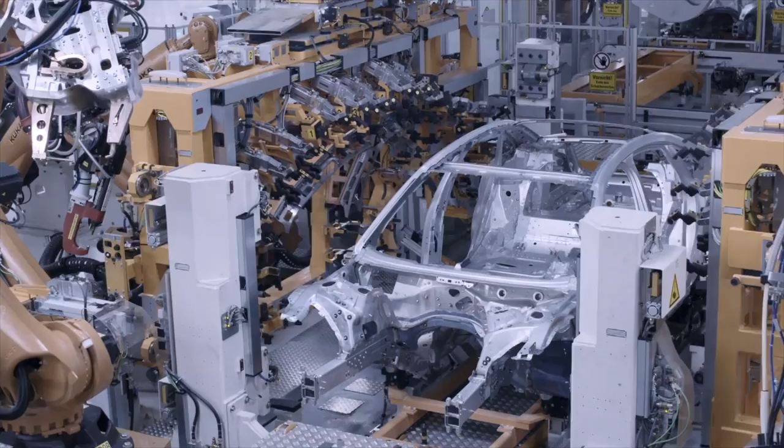The new A8 should be a complete revolution. Especially in the luxury segment, a lot can only be achieved through the human factor that senses it. The A8 must radiate prestige.

That's utterly important to me. Does what we decided 2 or 3 years ago actually fit into today's world? And will the customers accept it the way we want it to be?

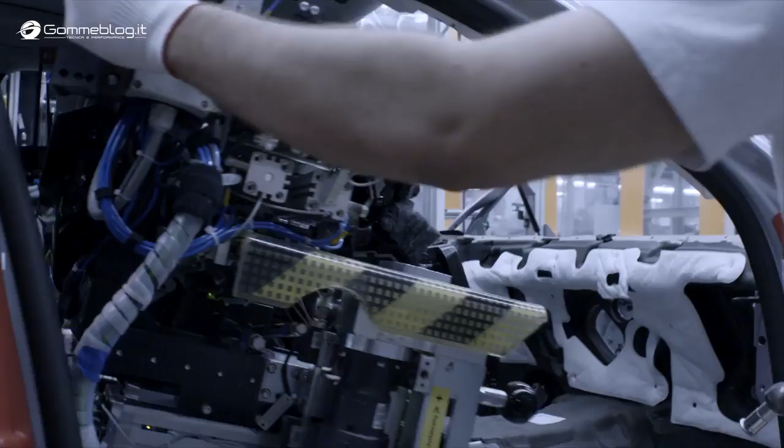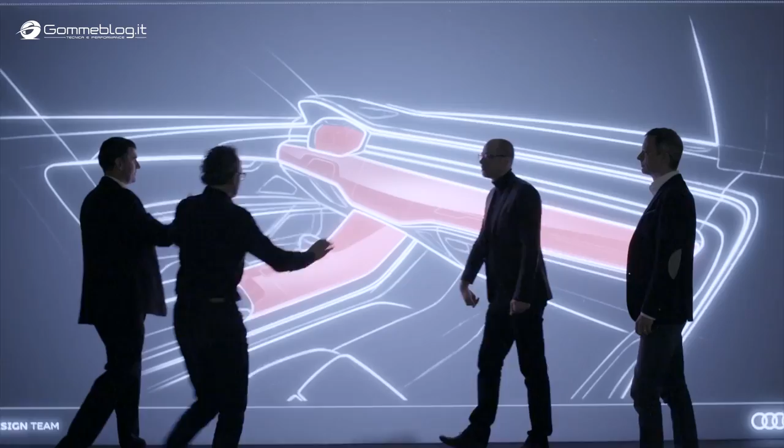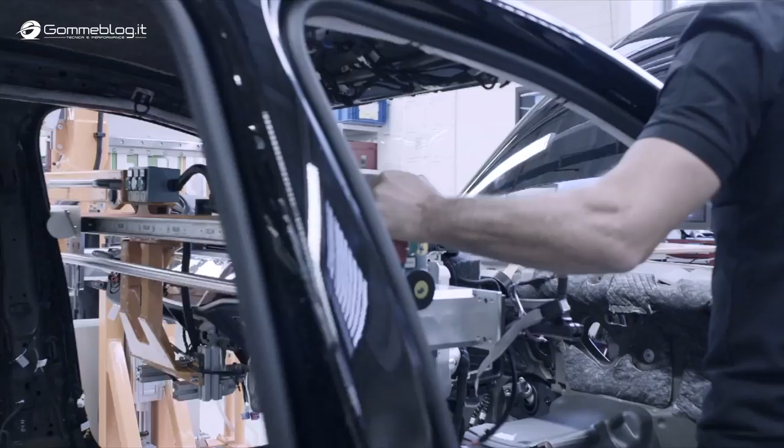The developers spent more than 4 years on this project, an enormous task, as the A8 was created in a time of probably the greatest upheaval for the company. Digitization, electrification, and piloted driving are only 3 buzzwords that shape this period of time. Never before had so many new systems been integrated into a car, and the A8 must set standards in each field.

The challenges are enormous. For the first time, the ZFAS, a central computer, is used to control many of the car's electronic functions.

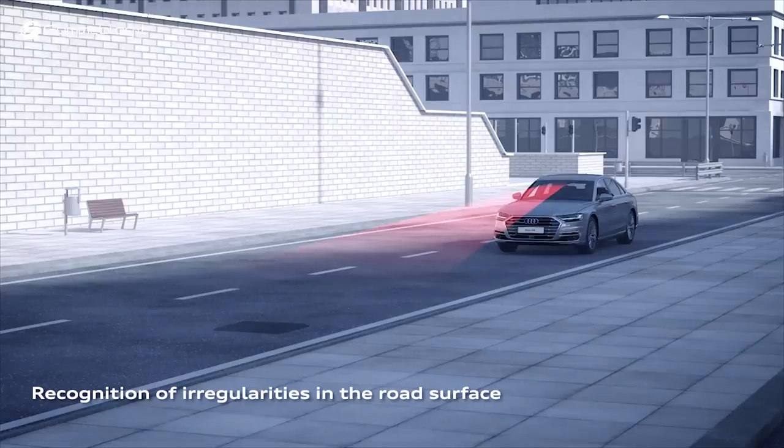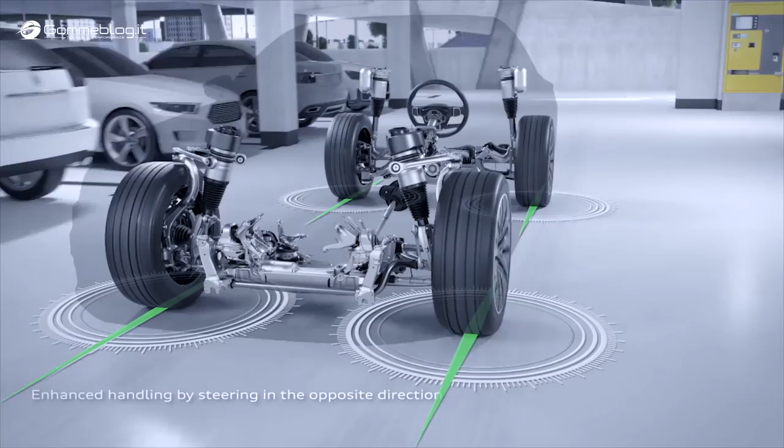In addition, there's an active chassis that permanently scans the road with the help of the front camera, and in fractions of a second adjusts the spring damper system accordingly, also thanks to the 48-volt power system. A steering system that is connected to both the front and rear axles, a hybrid drive that supports the engine, and much more.

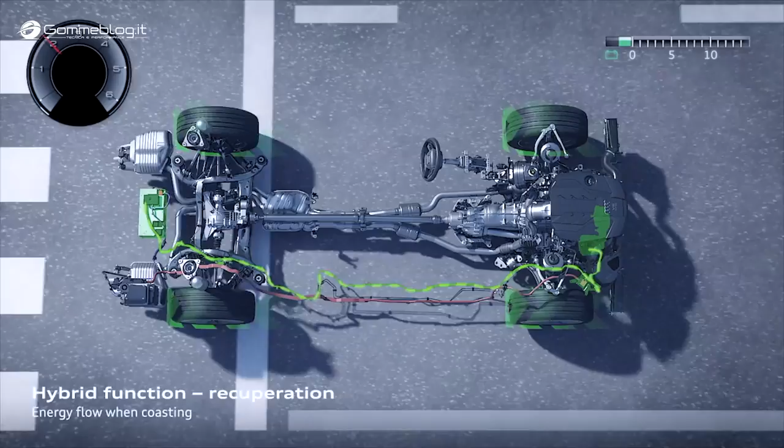All these systems had to be developed, made ready for series production, and tested throughout millions of kilometers. It was an enormous task at extremely high standards for the entire development team.

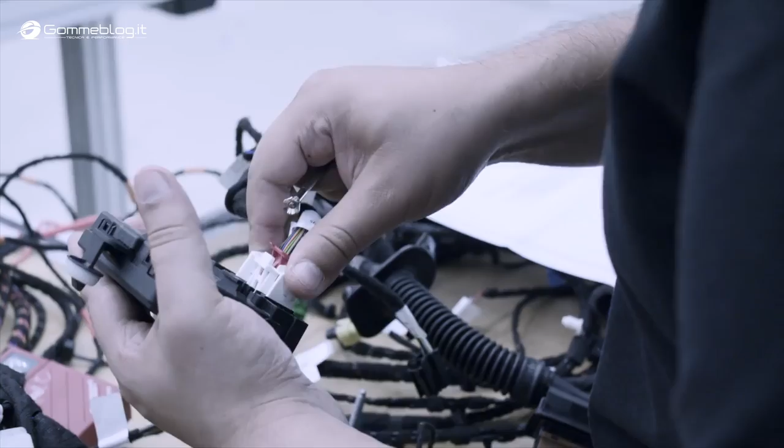For Audi, the A8 represents the dawn of a new era for the automobile, and the form is intended to instantly show this via its design. Marc Lichte was in charge of this task. Since 2014, he's been Audi's head designer.

Right on my first day when I started at Audi in February 2014, the decision about the A8 was made. On my second working day, I explained my strategy directly to the management board. There were 5 design models, one of which I had already done with a small team of people in Wolfsburg, and there were 4 alternative models that were done in Ingolstadt.

These 4 models had been developed over a year, and I had to come up with a design model in a very restricted time period. In the end, I was able to convince the management board with my design because it represented the contents of the strategy and the brand values best.

Internally, the development was codenamed D5. The D describes the segment of large sedans, and the 5 represents the 5th Audi model in this segment.

The very first of these models was the Audi V8 from 1988, when the manufacturers from Ingolstadt just set off for the luxury segment. The V8 was followed by the first A8 with its famous aluminium space frame, the world's first mass-produced vehicle with a self-supporting aluminium body.

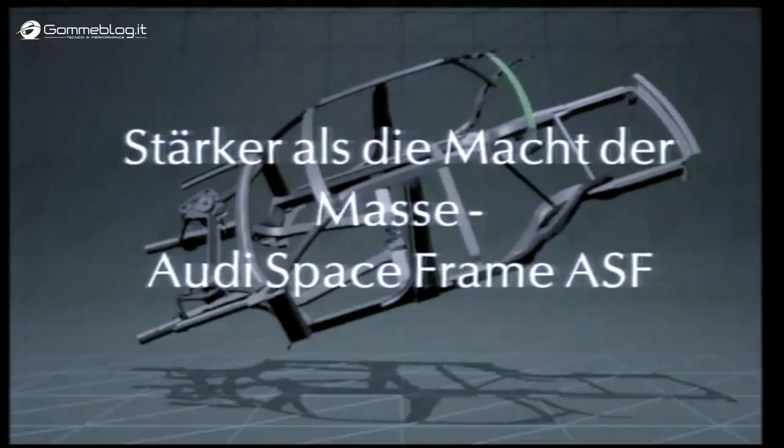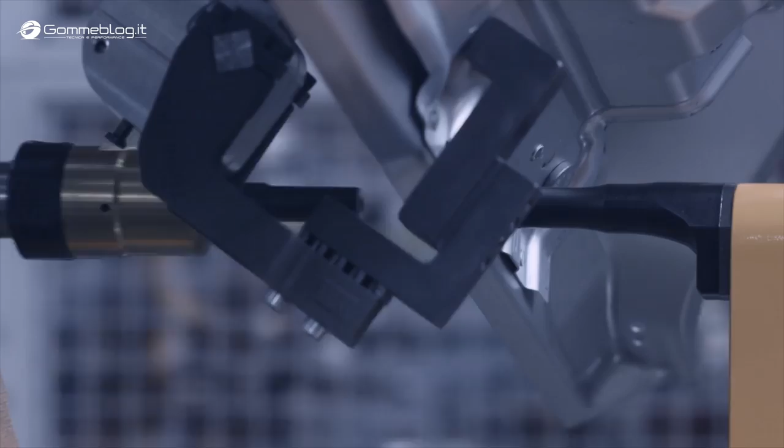Lightweight construction was also in the focus of the current A8. However, the demands on the body have increased considerably, as it must be able to accommodate several batteries and a mild hybrid drive. In addition, the requirements for comfort and occupant protection also increased. Audi therefore decided to develop a body structure made of several materials with differing thicknesses.

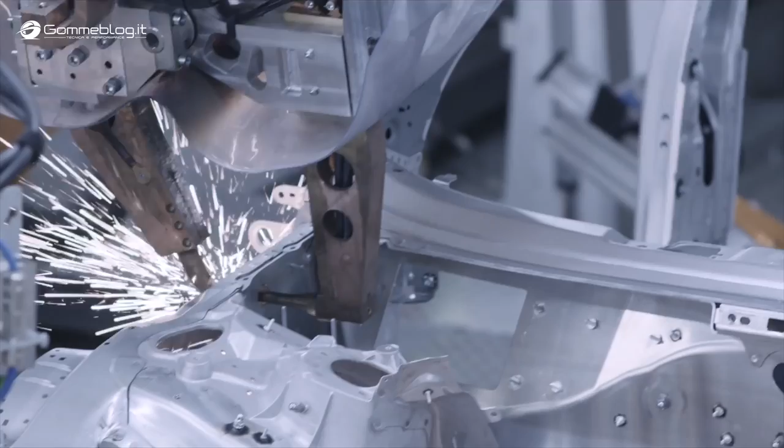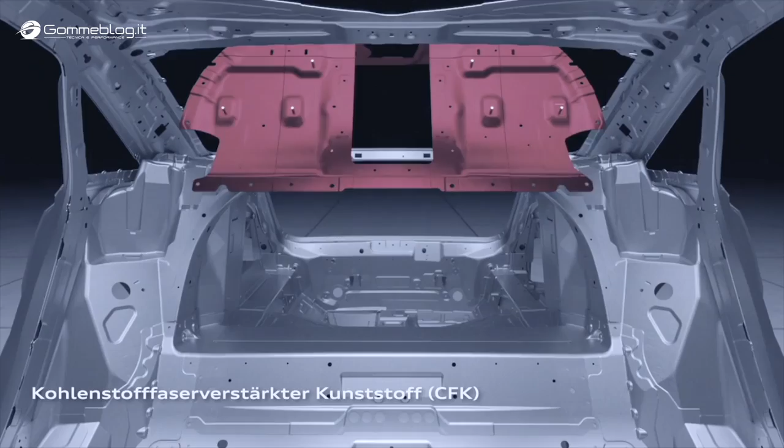Combining such a multitude of materials with each other is an immense challenge during production. We want to put the right material in the right place. As a result, we chose a multi-material body construction with steel, aluminum, and carbon, with the challenge of joining all these different materials together. This poses much more of a challenge than with conventional cars that are made of steel only.

Lapland in winter 2015. Car manufacturers are testing numerous aspects with their new vehicles at temperatures as low as -30 degrees Celsius. It looks like a lot of fun, and it really is, but beyond all that, the 4-wheel steering of the A8 is being tested.

At 7 o'clock in the morning, Ferdinand Hartinger and his team configure the car systems in the garage. After that, the prototype has to drive in the icy desert and prove that its complex technology works perfectly, even under these extreme conditions.

And how does it feel when you counter steer? The rear seems quite stable. The steering parameters are adjusted repeatedly until the developers are happy with the result.

Our customers will be surprised by the maneuverability of the vehicle. It doesn't feel as if they were sitting in such a big car, but it gives them the agility and maneuverability of smaller vehicles. That's the great thing about it.

In such situations, there is a function that turns the rear axle steering to 0, so that the rear of the vehicle can be handled very precisely and predictably by the driver.

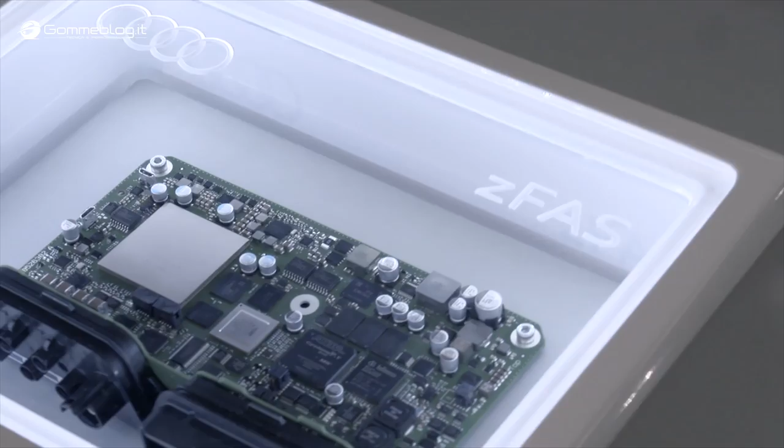Another development goal here in the far north of Europe is the perfect coordination of all driving stability systems. When does the ESC start to intervene? Does the Quattro drive react as desired? And do the systems communicate flawlessly with each other? And how do the electronic components react to the Arctic cold?

The central computer alone, the zFAS, which bundles all the software of the driver assistance systems, is uncharted territory altogether.

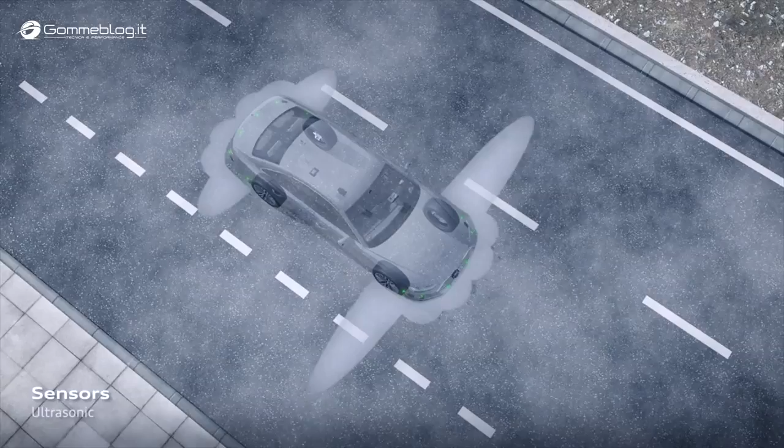There's still a lot to do, especially on a functional level, because the new A8 is a vehicle that is mainly shaped by software. It includes many different features. We're still hard at work, and there's some way to go, but I'm convinced that we will manage.

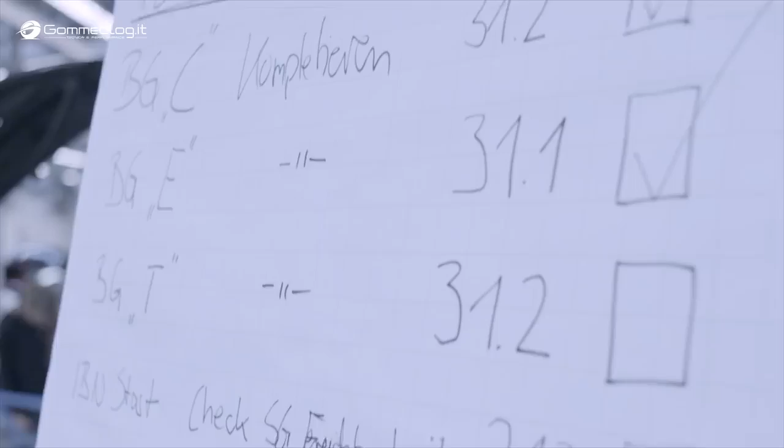Ingolstadt at the end of 2015. The design team completed its task. The new Audi's shape has been approved by the management board. This one-to-one clay model allows the designers to view their design in 3D for the first time.

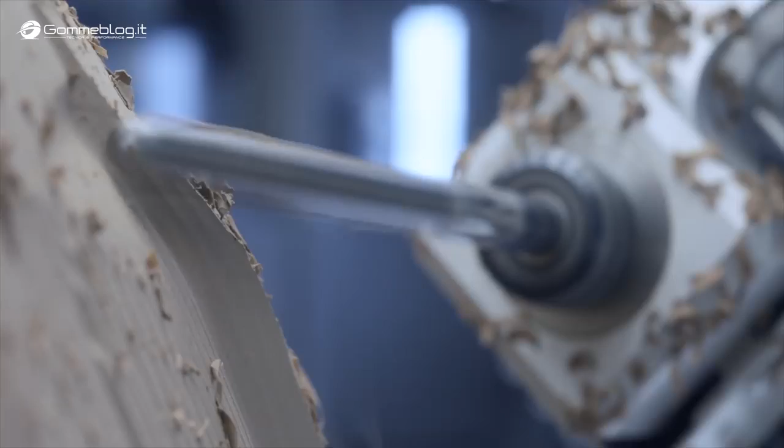This clay model accompanies us in our development process for about 1.5 years, and the final model, the so-called design freeze model, is then made of plastic.

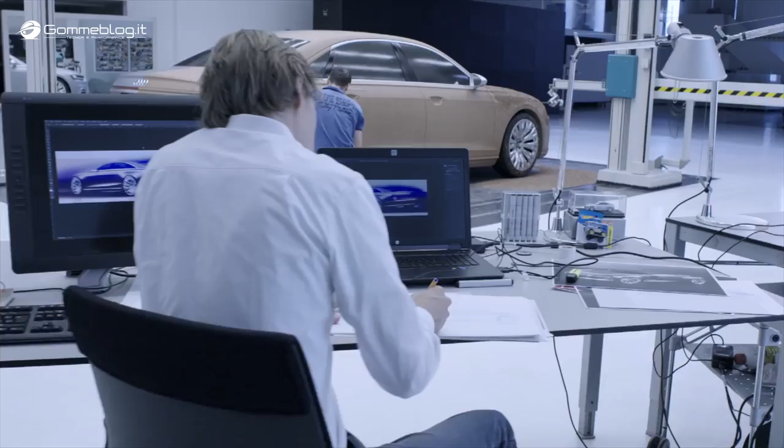Despite the computer animations, a model is an important tool in order to determine the design. It can be changed again and again during the design process, either by machine or by hand.

The manual modeler focuses on translating the designer's two-dimensional sketch to a three-dimensional model in order to bring the designer's idea to life.

Automotive design is also a competition, where at the end of the day, only one of the designs wins. Philipp Römers and his team won the contract for the A8. Together with Marc Lichte, he went from Volkswagen to Audi.

Of course, it's great to see how such a design develops from sketch to model to an actual car. And it's also great to see a car with our design driving around one day. That's something very special.

Once a design has been approved, it is then refined. Despite all the digital tools, this is still done by drawing lines by hand and with the sensory experience with the model. The new Audi flagship is not only the evolution of the A8 model line, it also introduces a

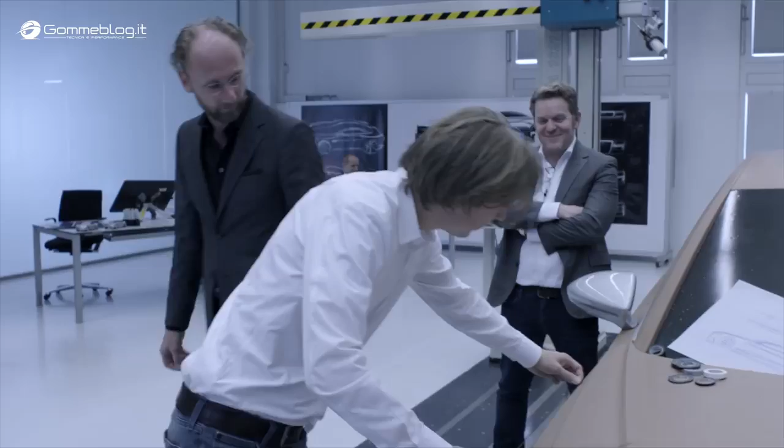new design language that will characterize the models to come. It's a demanding task Marc Lichte and his team have to master.

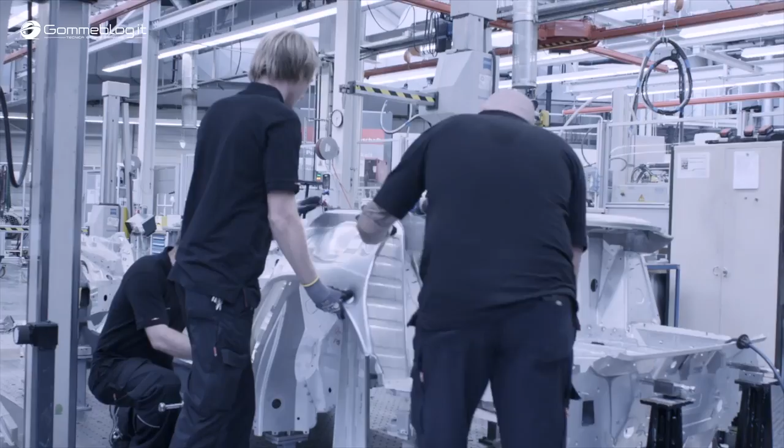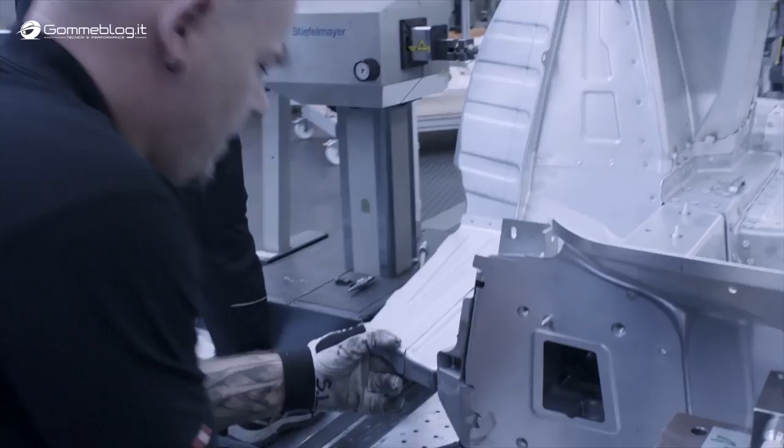At the same time, in the Audi plant in Neckarsulm, in the so-called pre-series center, employees are building the first prototypes. What will later be fully automated during series production is done manually here. For the first time, the body is manufactured via composite construction.

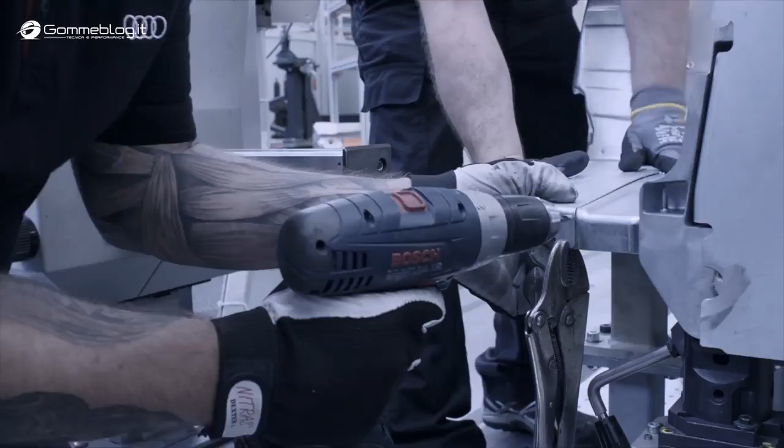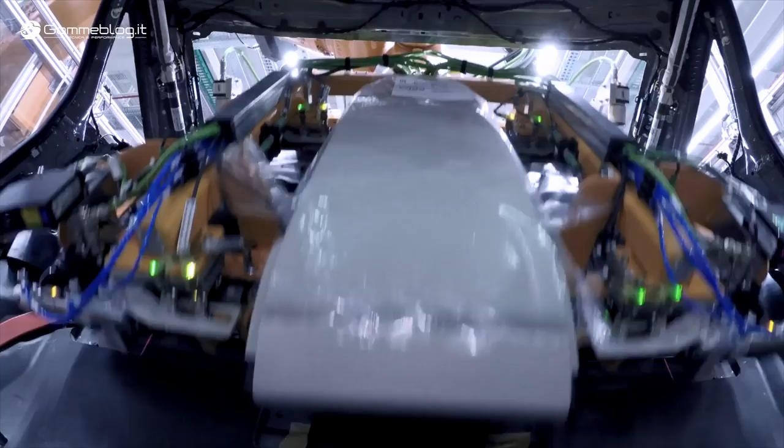Here, it has to be proven if what the engineers developed on their computers can actually be built. Steel, aluminium, magnesium and a carbon back wall must be joined together. Welding, screwing, riveting, gluing, all the joining technology available today is used in the new A8.

Audi has a lot of experience with bodies that are made of different materials, but for the A8 many of these techniques are used for the first time.

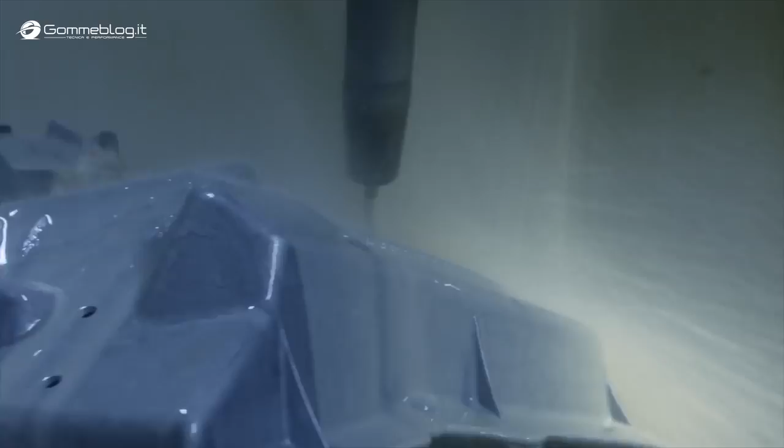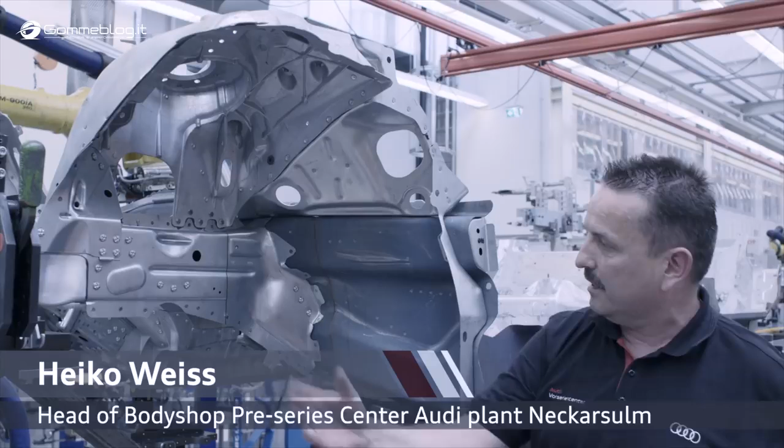This wheelhouse is a good example for the various joining techniques. Steel can be joined with steel using the oldest and cheapest method, resistance spot welding.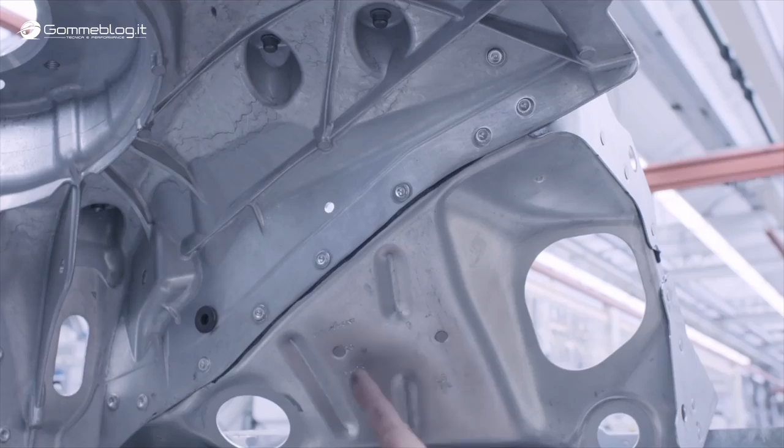Inside the cavity, where it can't be reached from behind, it is screwed together with so-called flow drill screws. There's also riveting, which you can see here. This process doesn't require heat and therefore doesn't warp the material.

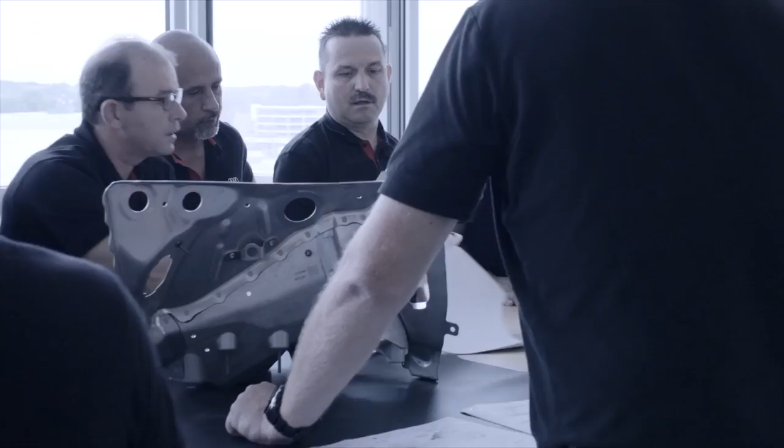Of course, there can be disturbances in the early phase of development. Some parts may have too big of a tolerance. Others do not meet the quality requirements yet.

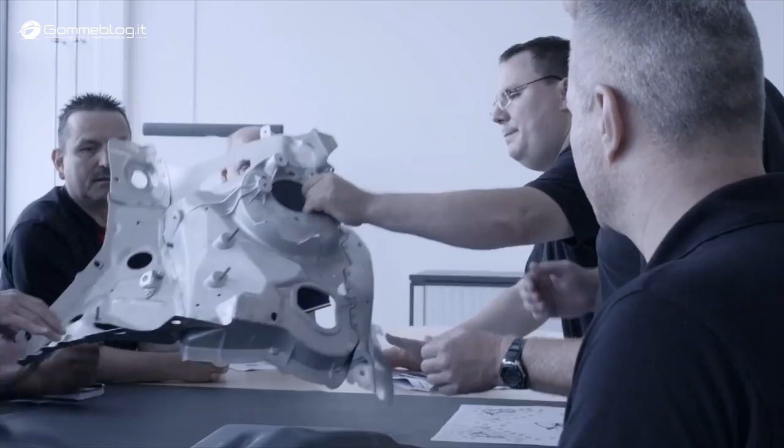Each shift starts with obligatory meetings where the workers aim to eliminate the sources of error. Even the slightest inaccuracy can quickly prolong the development of the whole car, which would be rather unfortunate.

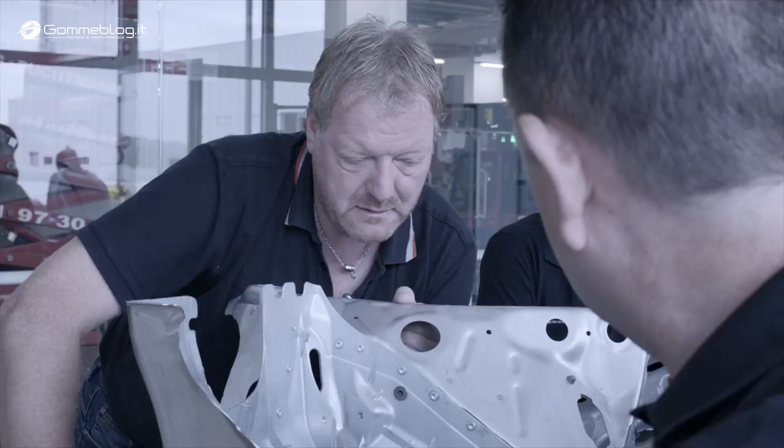If the parts are not suitable for construction, we have to cease production immediately, and as soon as the new parts are available, we will continue the production process accordingly. Contrary to the other spots up there, these rivets aren't evenly distributed.

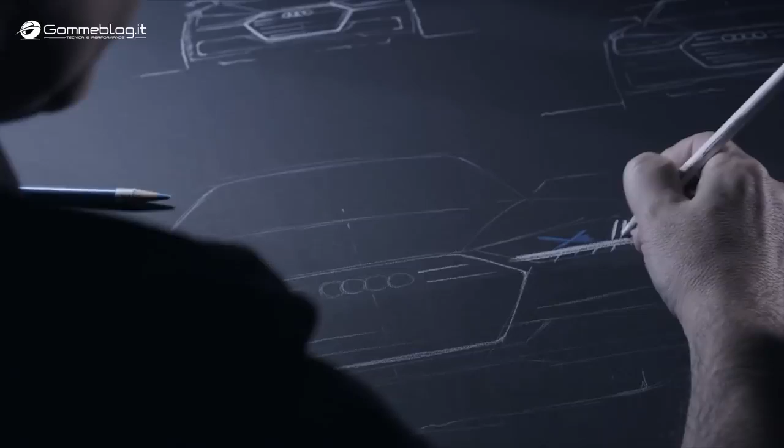In Audi's light channel in Ingolstadt, technicians and designers are developing the head and rear lights of the A8. In recent years, lighting has become an important stylistic aspect in automotive design.

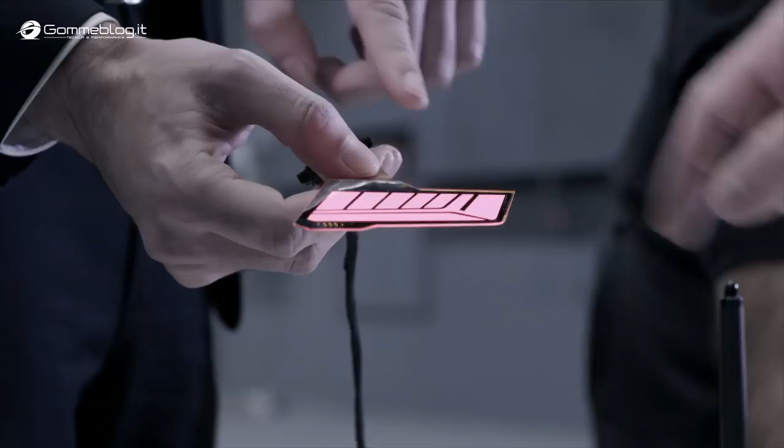We have the same rhythm here. Perfect. Freshly developed technologies constantly provide the designers with new possibilities. One of these elements is the OLED, an extremely thin light source that's ideal for illuminating small, narrow areas.

Cesar Muntada-Roda and Stephan Berlitz are responsible for lighting at Audi. Our creations should be immediately recognizable on the street, as part of the Audi brand, but also as to what kind of vehicle is moving towards you.

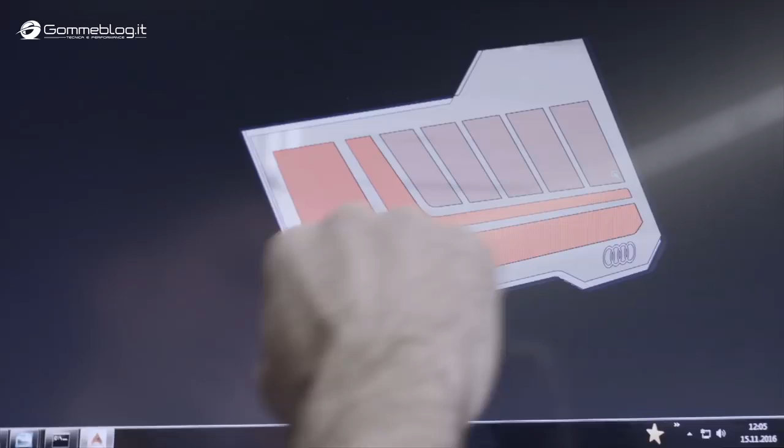The development effort is truly considerable. In order to develop such systems, we have to start years in advance. We start with basic research. We were among the first manufacturers to use OLED, and our efforts were a boost for the whole automotive industry, and all of a sudden, it was available everywhere.

During the development phase itself, there are a lot of tests, where we have to do many test drives on the road. But here, in the light channel, we can see beforehand whether the lighting fits and if all the functions go together well. This all happens before we actually do the test drives. It requires a lot of adjustments to create the ideal lighting for our customer.

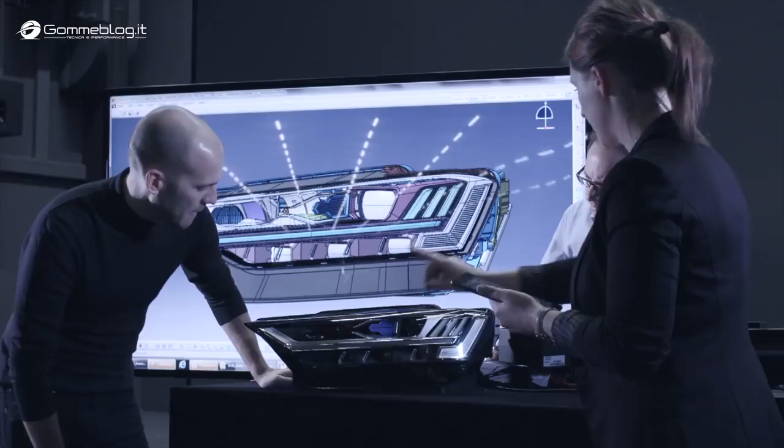Of course, in the development of the A8, the customer's wishes need to be taken into consideration too. They are constantly being scrutinized in numerous studies. Our customers often prefer to drive with high beam, which is why we provide them with an ultra-modern light assistance system, matrix headlamps, where they always have high beam without actually blinding anyone. For better visibility, they get laser headlights. There is another exciting element on top that includes our light animation for the wow effect.

The Arctic Circle in northern Sweden. Timo Strutz and his team are preparing the test car. For the first time, the engineers will check whether the complex electromechanical chassis works smoothly at temperatures below -30 degrees Celsius.

The chassis and electronics of the new Audi A8 are implanted in its predecessor. This is common practice in automotive development, as the use of so-called technology carriers means that test vehicles are available at an early stage of development, and these cars do not need to undergo expensive camouflage. The car that already cooled down in the night is driving out of the garage.

This lowrider show is in fact a serious inspection of the car's suspension systems. All functions of the chassis must work reliably on the test site. It may look funny when we make the car bounce, but this is a test sequence that allows us to keep the vehicle repeating the same movements.

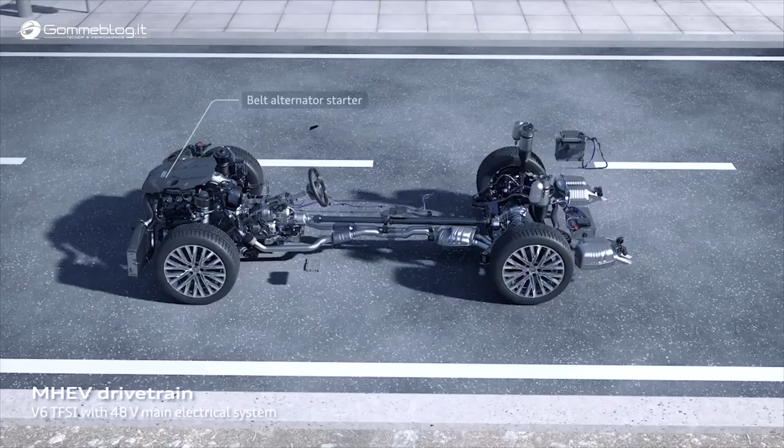We can examine how the currents, the acoustics or dynamics change due to the cold. The chassis control of the A8 is technically very complicated. Due to the high voltage of 48 volts, the electronic components react in a flash. The front camera detects bumps at an early stage, and the chassis controls react accordingly, unnoticed by the passengers.

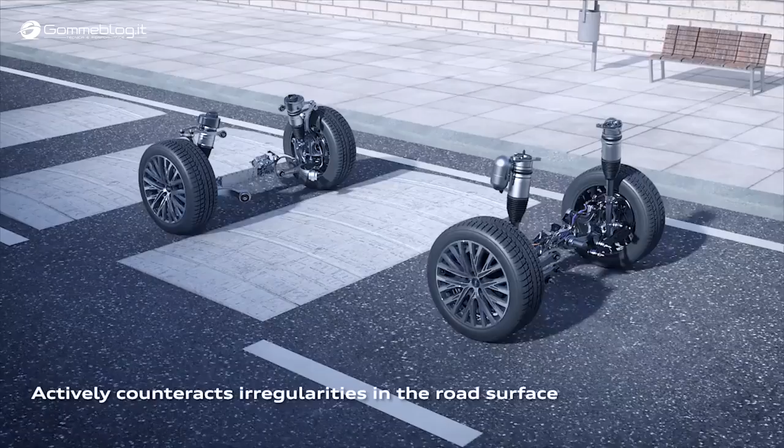Even wobbling movements of the car, for example in curves, are compensated by the system at lightning speed. Since each wheel is controlled individually, Audi is able to offer a feature that reduces the consequences of a side impact by raising the body on the affected side.

This multitude of safety-relevant technology is tested during endless test drives in all climatic areas of the world, until everything works reliably in all conditions. In addition, the vehicle must not make any strange noises.

The main purpose of this track is to detect any noise in the area of the suspension or the axles. This may be a squeaking or some kind of breathing noise from an air spring or damper, or even from our actuators.

The tough day-to-day testing wears the developers out. Some of them are on site for up to 3 weeks. In the Arctic cold, where there are only 4 hours of daylight, they're grateful for a little diversion.

There's a lot on offer here, even at night. If you don't want to relax, there are many things you can do. The automobile companies created their own infrastructure in Lapland. Playing ball is also part of the relaxation program during the extensive testing process.

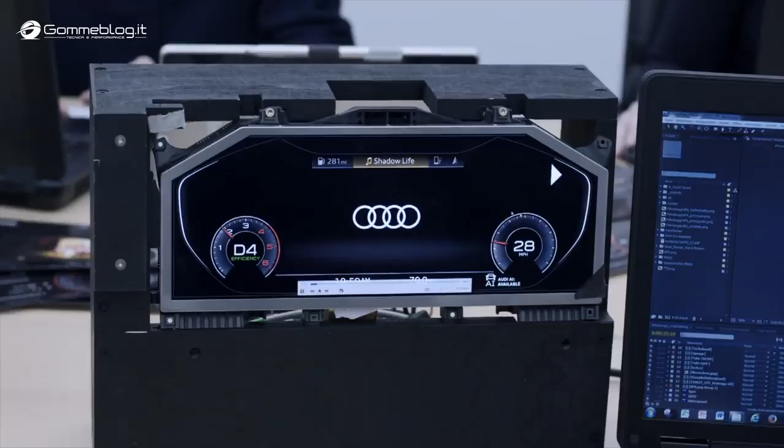There's no sign of relaxation at the design centers though. The completion of the car's interior is running at full steam. It must be determined how this luxury car shall be operated in the time to come.

This is the first time that there's a completely new operating logic behind everything. Before, everything was remote controlled, but in the new A8 we will switch to a touch-based operation. This is a new challenge for us, but we took it on with great pleasure. We had a lot of fun. It's always great for a designer to be able to do everything from scratch. And we also learnt a great deal in the area of user experience.

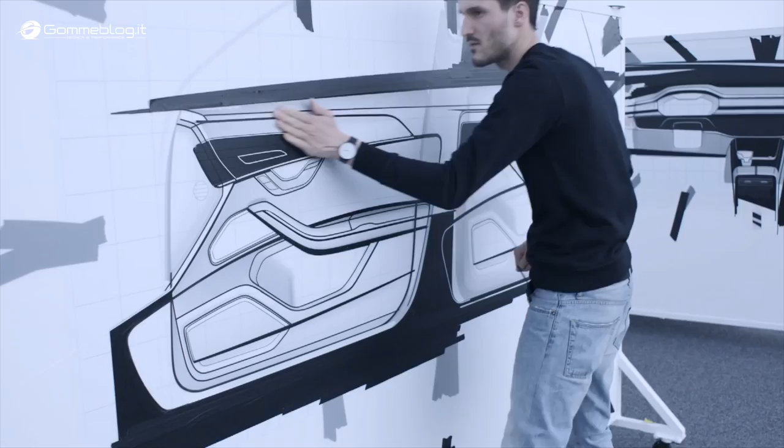Despite the rapidly growing digitalization, classical handicraft is still in demand. With taping, I can try out proportions very effectively on a two-dimensional level. I can create tension through lines and translate everything into CAD.

With this clay model called the seat box, the designers can explore the spatial effect of the surfaces. Even in our digital age, the physical impression plays an important role, especially in the luxury segment.

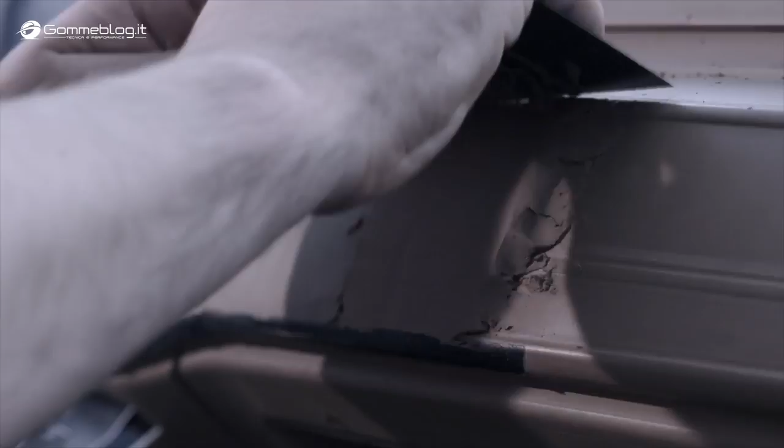I need a physical model in which I can sit in order to experience the spatial effect of the interior. That's something we haven't come up with in the virtual world yet, which is why I need this model.

Light is more and more often used as a design tool in the interiors of cars. For us, light as a design element is the perfect means of creating ambiance. We can do this with colored light, but also with certain light elements, like this precise light that you see here, or the ambient light as we call it, with which you can make a switchboard seemingly float.

In luxury cars, customers expect technical innovations and exquisite materials in connection with workmanship of the highest quality. Coming up with the right composition is the task of the color and trim department.

On the one hand, fashion and zeitgeist plays a major part here. On the other hand, it's about colors and materials that must still be somehow en vogue even years later. Simona Falcinella, head designer at Color and Trim, was handed this sensory task.

I really have the feeling that you can feel how many people put attention, care, professionality to this product and enjoy it while you're driving.

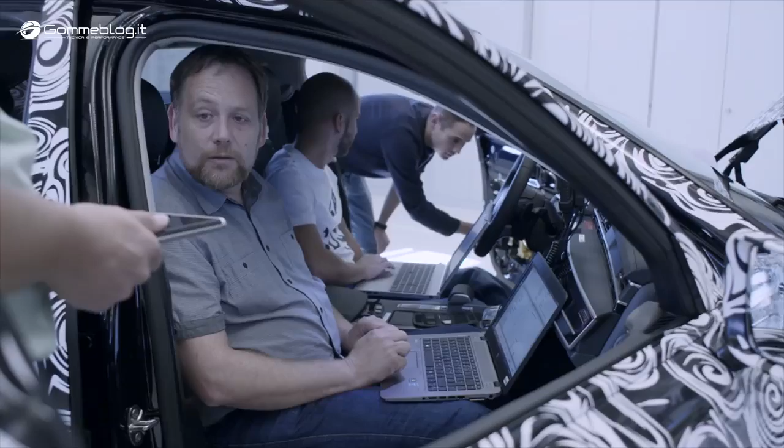Our error log shows that there was a problem with the central locking. We will check the wiring, following the respective diagram, and see if we can locate the error somehow.

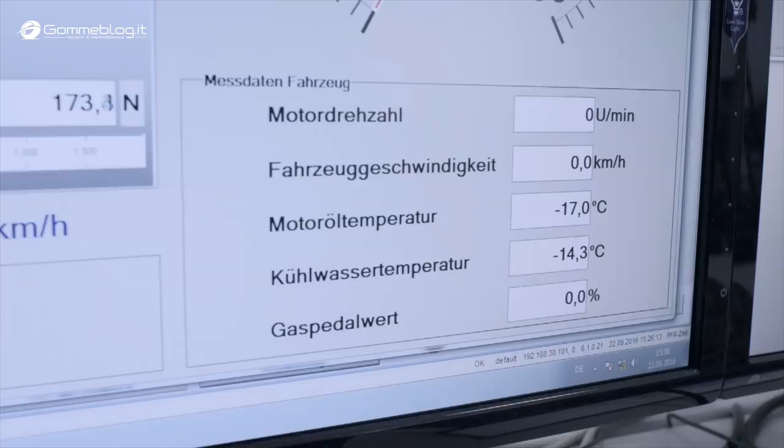At the Audi plant in Ingolstadt, the whole world can basically be simulated. Temperatures of -30 to +55 degrees are displayed at the so-called climate roll test bench. The engineers check their systems once again.

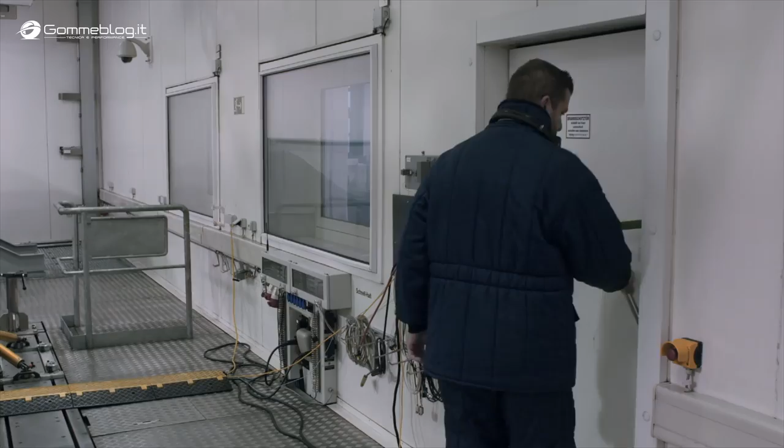Usually a car is tested here for 2 weeks, the first week in warm or hot temperatures and the second week in cold temperatures. Whatever wasn't possible in the Arizona desert or the snow of the Arctic Circle is made possible here. Going 250 at 50 degrees Celsius or an ascent at -30.

In these laboratory conditions, all components of the car can be tested extensively. I would suggest we warm up the engine now, and as soon as it's warm, we start the ascent.

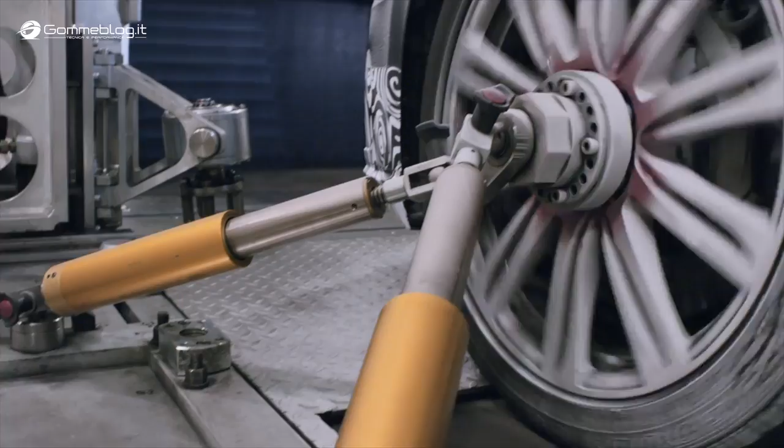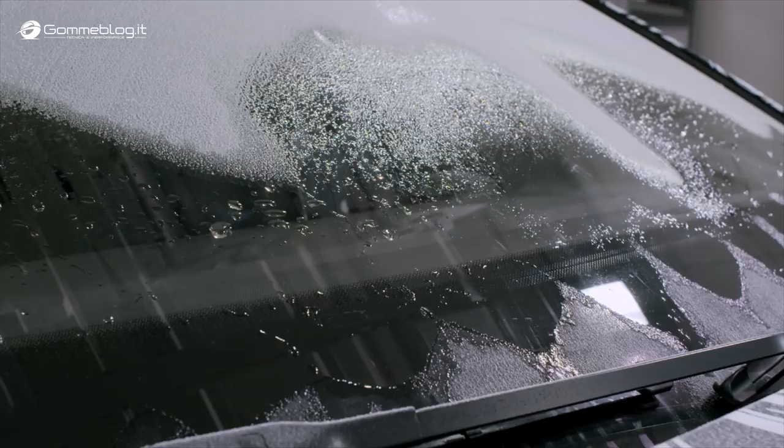We approach the vehicle, unlock it, start the car, and drive off. We start slowly, especially in the low temperatures, so that all the lubricants can get up to temperature, and then we check the heating of the air conditioning, the rear window, and windscreen heating. Everything is scrutinized very closely.

The technical development of the big Audi approaches the finish line. The so-called SOP, start of production, is imminent. It's time for Audi Communications to order the first advertisements.

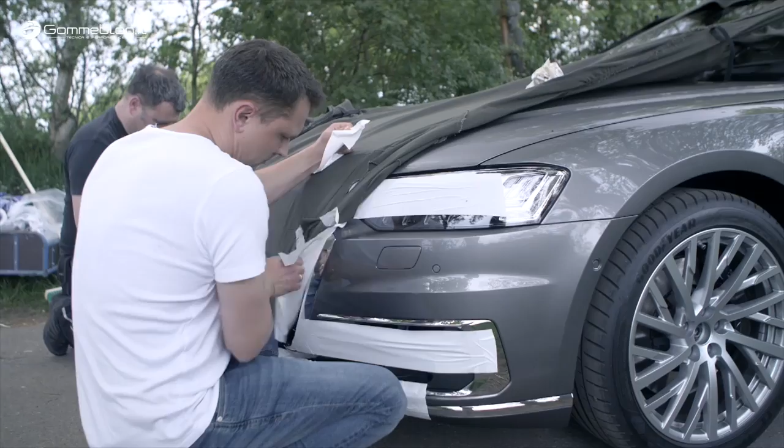May 2017, near Hamburg. Three days of shooting are scheduled for the production of the first clip. Secrecy is of the utmost importance. The most important thing on location, when the car hasn't been presented yet, is that it is hidden from sight, because we shoot out in the open. Nobody is supposed to see the car before it is presented to the world press. This is why my colleagues tape over so much and only leave open what the camera has to see. The regulations are really strict.

Audi landed a coup, forming a cooperation with Marvel Studios to promote the A8 with the Spider-Man: Homecoming movie, released in June 2017. The A8 is first shown at the film's premiere. Still camouflaged, Audi's top model is shown to the public on the red carpet.

The Audi ad shows a car ride of a father with his little son. Two young actors were required in order to play the son.

We must follow certain time limitations. Children aren't like adult actors. If they don't feel like doing something, they won't, and when they're tired, they're tired. Shooting with two kids like today is an additional challenge.

Las Vegas, February 2017. The Audi A8 is a global car. Most parts were developed in Germany, but the car was also adapted to local requirements at the most important sales markets. In the gambler's city, the engineers have the opportunity to test another part of piloted driving.

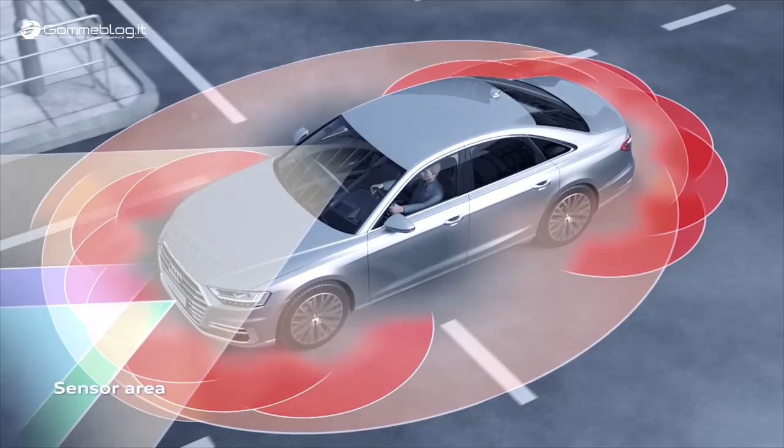The A8 also includes the so-called traffic jam pilot. In this mode, the car already drives quite independently at speeds of up to 60 kilometers an hour. The technology that makes this possible consists of radar, a laser scanner, cameras, and software that controls everything. Since these systems must work absolutely safely, comparable to the autopilot of a passenger aircraft, the individual modules are protected manifold. The developers of these systems are highly specialized and also work on the so-called remote parking pilot, which shall allow the car to drive into the garage all by itself.

Markus Schwierz must have driven into this garage thousands of times. He helped develop the system. This is the remote parking pilot that allows customers to comfortably have their car park in the garage via their smartphone.

We included a laser scanner that measures the garage with high precision. The customers can use any parking space, for example a cross parking space, or parallel to the road. This means they can also drive past parking spaces in a normal garage or a public car park, activate the function from inside the car, and then conveniently let the vehicle park itself via smartphone.

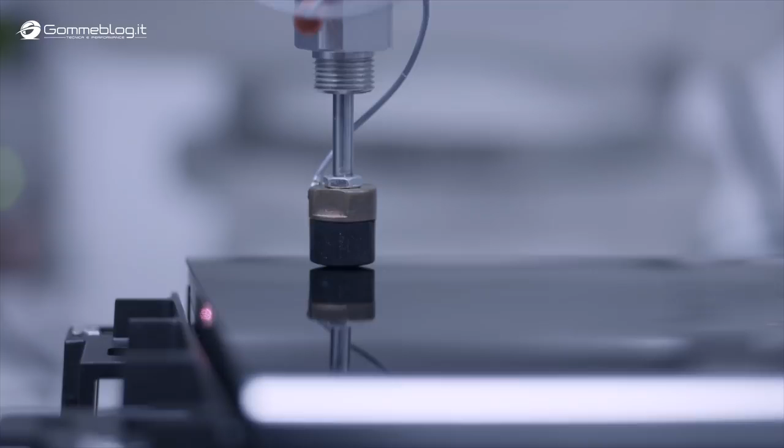When a certain force is reached, a small vibration is generated that gives the brain the feeling of pressing a button.

Many A8 customers will have someone else drive them, which is why the comfort features of the limousine must also be accessible from the rear. This is done via a smartphone-shaped tool.

You can operate the air conditioning or the massage functions. You can control the scent in the vehicle, the interior lighting, or the complete infotainment package that includes the radio or multimedia from all kinds of sources. But you can also make a simple telephone call.

Today, the A8 graduates from high school, so to speak. Rupert Stadler, chairman of Audi's management board, personally takes the exam in his own hands. The manager asks for the status of development and also takes a close look at the control panel.

I experienced the car half a year ago, a quarter of a year ago, a month ago, and now I realize it's close. The car has matured quite nicely in a way that fits.

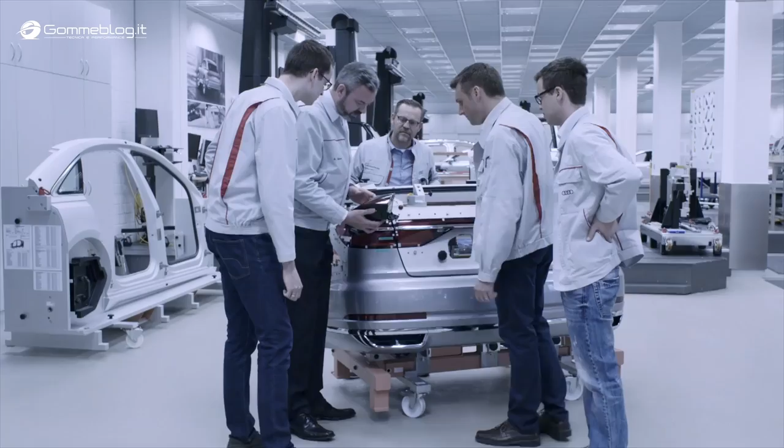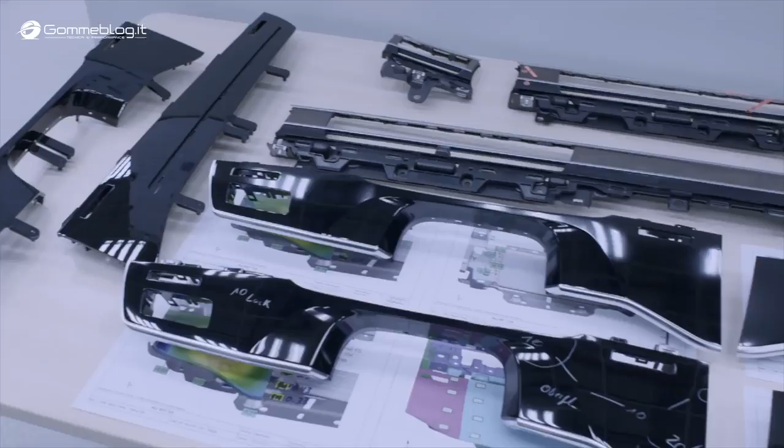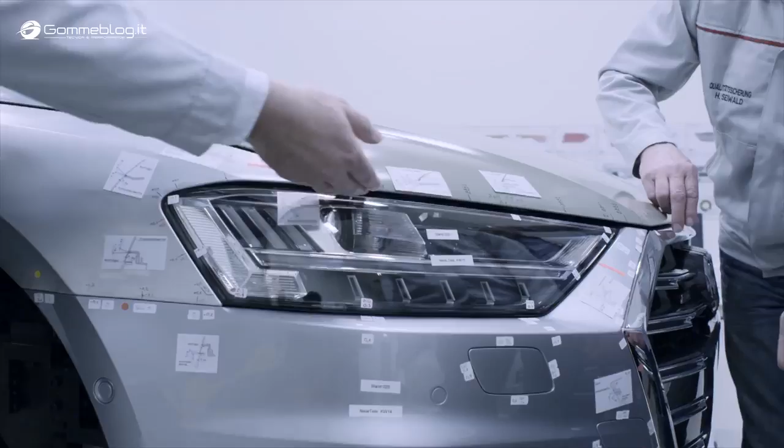It's the final phase of the A8's development. It's all about fine-tuning now. At the so-called Meisterbock in Neckarsulm, the technicians ensure the quality of the individual components and assess their precision. Are all gap dimensions within the specified range, and where do improvements still need to be made? Andreas Guris's department follows all stages of development and shall ensure perfect quality up to the series production.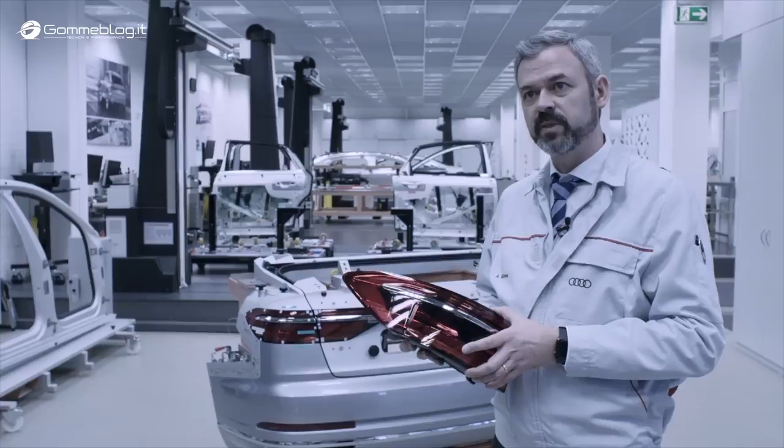During the usual development of a vehicle, we have to go through about 5 to 6 stages. In the case of very complex, very complicated components, as is also the case with new technologies, there can be up to 10 different stages. We put a lot of energy and love into our vehicles.

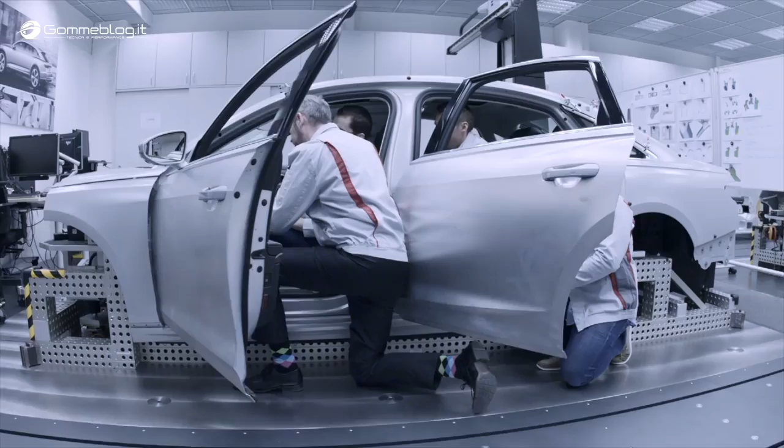Especially in the interior, the demands are very high. Is wood, aluminium and leather a perfect match? Small markings indicate inaccuracies.

For us, these are the working points with which we display the current improvement measures together with our colleagues and the component supplier. We say, we are not in default. We are not there as we imagine it, and they're really being worked through point by point.

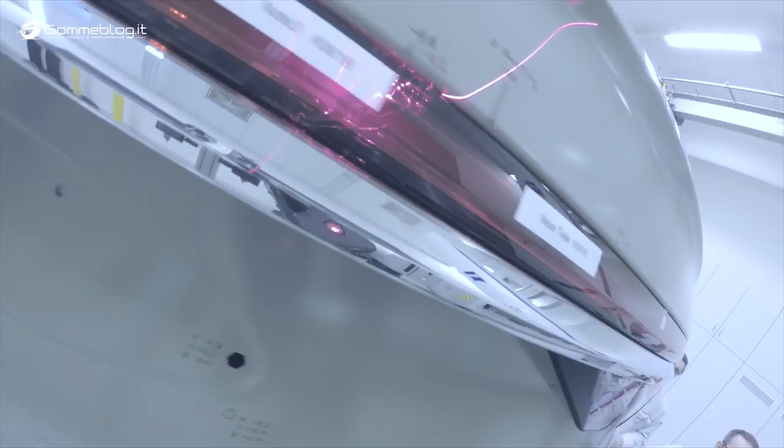There are strict specifications for each component, which the suppliers must meet the high expectations. Only if they stand up to the scrutinizing examination of the Meisterbock team and their measuring instruments, there'll be an approval. There are clear guidelines for our suppliers, which we thoroughly check here on a technical side, which means we measure everything. But we also feel it, because many things, especially in the luxury segment, can only be discerned by human beings. There's also some drastic treatment during development.

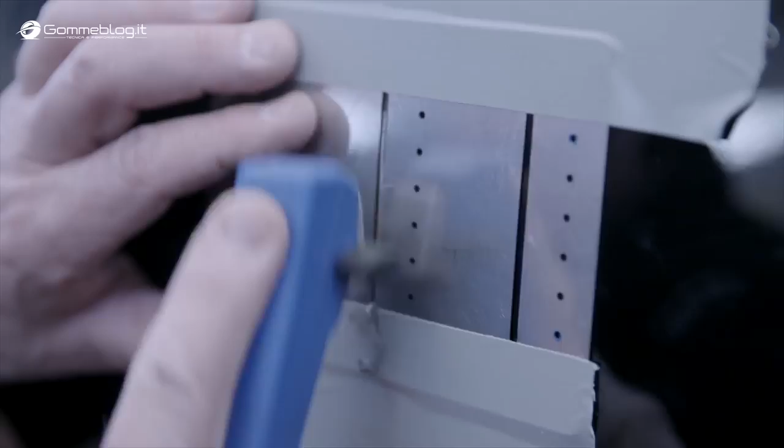At a strictly fenced-off test area near Ingolstadt, the A8 is being tortured. In just under 5 months, 12 years of a car's life are simulated. In the so-called Ingolstadt Corrosion and Aging Test, INCA for short, the paint is scratched and sprayed with salt water. The car is driven through mud and salt puddles and bombarded with gravel several times.

The D5's body consists of a complex mixture of materials. So, corrosion is a big challenge in many ways. Furthermore, the body has many components which all need to be sealed against each other, which is why the sealing concept of the D5 is very complex and elaborate.

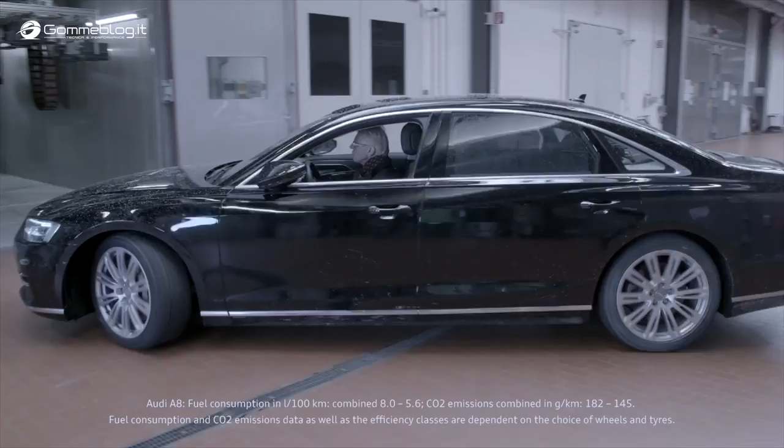Most drivers would never do this to their cars, but the process helps the engineers to ensure quality. This shows where wear and corrosion occur prematurely.

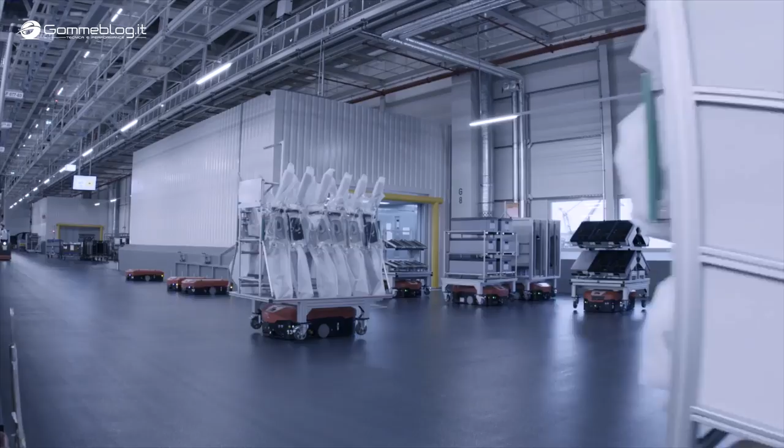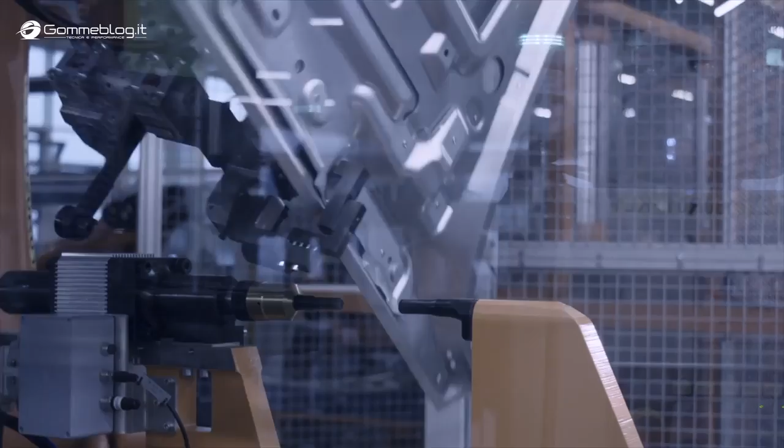Neckarsulm in autumn 2017. Series production of the A8 is largely automated. What started with a design draft over 4 years ago is now put together on a production line.

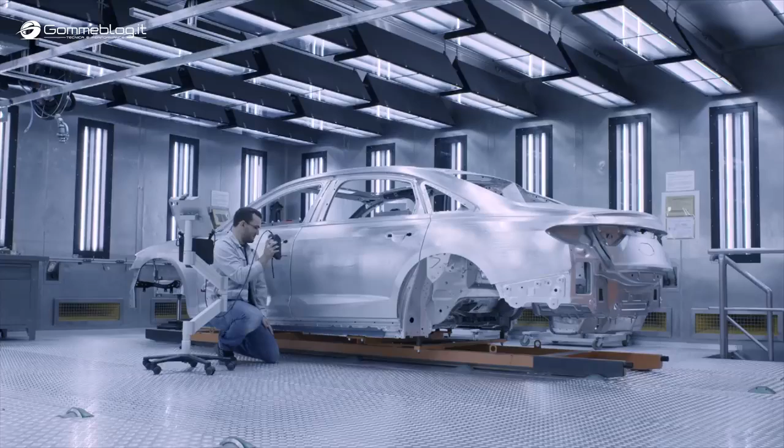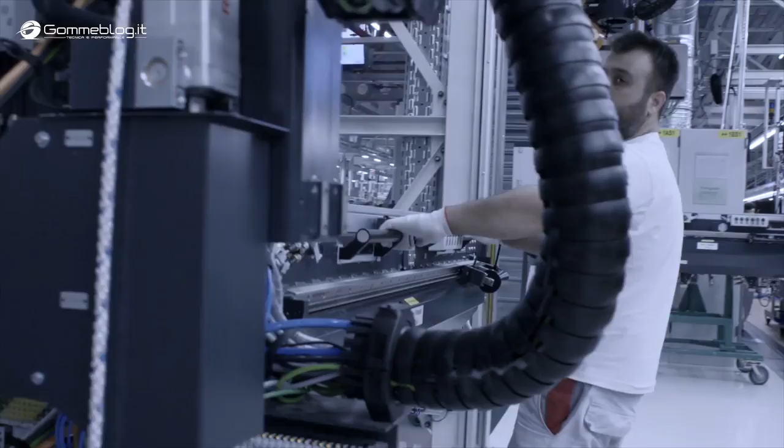This is a very special moment for me and my team because we once again can witness when technological history in automotive engineering is written. The Audi employees have come a long and exciting way. Their combined skill and passion once again proved the slogan Vorsprung durch Technik to be true. Everyone involved is proud of their joint performance.

I'm excited about the vehicle. It fills me with pride.

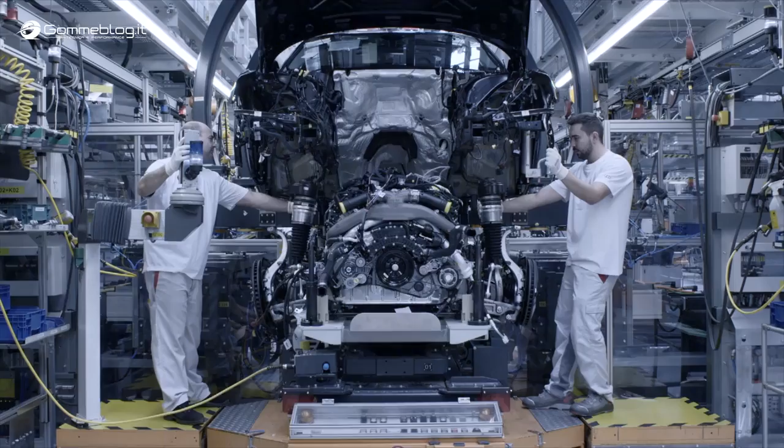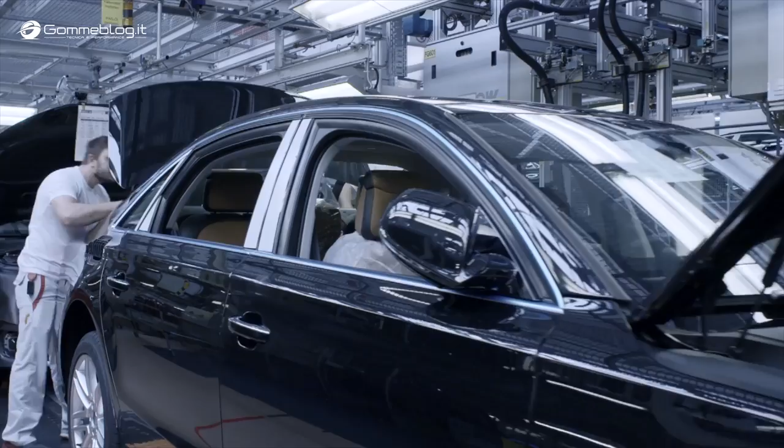All A8s are produced for the world market in Neckarsulm. The cars that are now built here in the early stages will go to the IAA in September 2017, as well as press and marketing events. Soon after, production is in full swing, and the first customers receive their Audi A8.

At its premiere in Barcelona in July 2017, the world press will get its first impression of the new Audi A8. The new A8 is extremely important to us. It's our flagship car. It sets new standards in design and technology and launches a truly impressive model offensive.

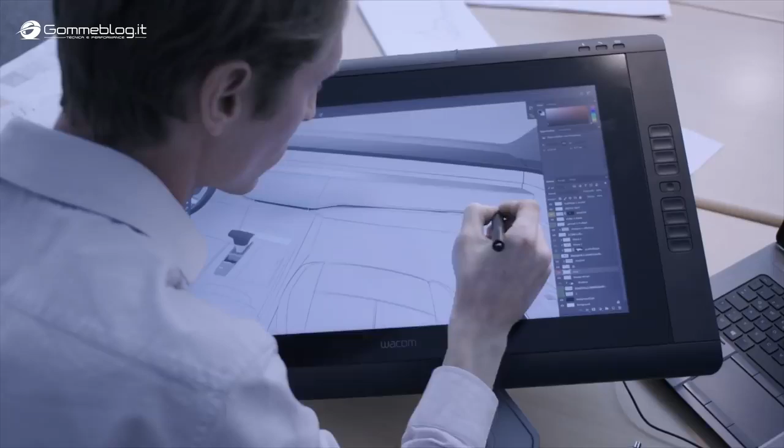With the development of the A8, Audi definitely pushed the limits of what is feasible. With the Audi A8, the developers and designers have done everything to bring the car of the future into series production. But after the match is also before the match. And so Audi are already facing the challenges for the cars of the day after tomorrow.